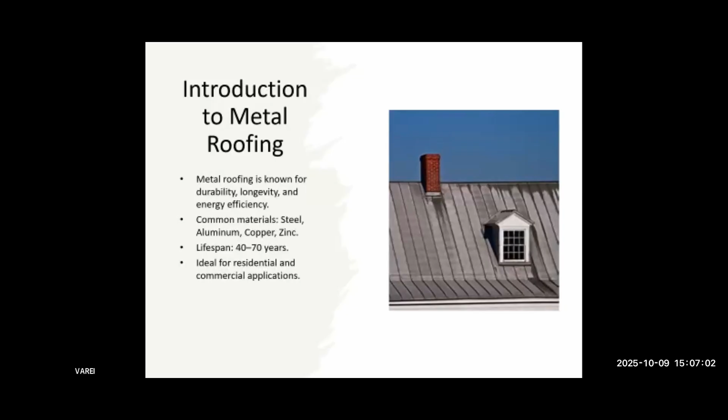Categories of metal roof systems. Exposed fastener metal roof systems. You're going to see this more in rural parts of Virginia. We call it sometimes the ag panel, tough rib, tough lock, true lock. It depends on who you're buying that panel from, what they call that profile. You see it a lot on metal frame, metal buildings, like people putting metal buildings in their backyard. Most of the time, the walls and the roof of that are going to be your exposed fastener metal roof, which essentially you just have a fastener that goes through, and that fastener is waterproofed with a rubber grommet, either neoprene or EPDM.

Stamped metal roofs are becoming increasingly popular. There are several companies that are kind of hanging their shingle around the stamped metal. Stamped metal used to mean stamped pieces of tin that were all put together, very pretty, very hard to find. You don't really see those in newer installations. Now you're seeing stuff in different profiles that look like slate, look like Spanish tile. They even make one that looks like an asphalt shingle, though I don't know why you would spend extra money on that.

But stone coated metal, we've seen a lot of that too, where they're putting a granulation on the outside of that metal to kind of add some rigidity and decrease the amount of metal they're putting in it. I don't really like those. We can talk about that too.

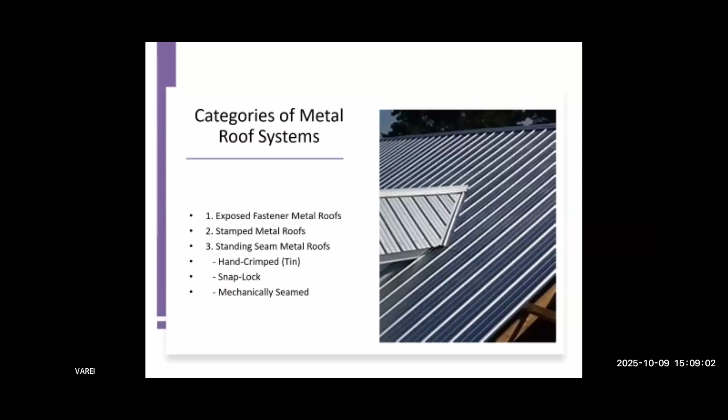And then of course standing seam metal roofs, and that's kind of going to be the high end version of metal. Again, any of your tin roofs, the old tin that you're seeing, is all considered a standing seam. You got the snap lock panel, which we'll discuss, and then mechanically seamed, which is what most of your commercial buildings are going to have on them, and any of your low slope has to be mechanically seamed as well.

So exposed fastener, we just talked about it. Same thing, that's a very popular profile of exposed fastener. The roof typically is going to be a 29 gauge galvalume. Now in steel, the higher the gauge, actually the thinner the metal. Most of your steel panels are going to go from 22 gauge to 29 gauge.

22 gauge being, in almost all cases, an industrial commercial setting where the roof system is also the roof deck. The 22 gauge steel can span structurally over 5 to 6 feet, depending on the profile of the panel, which means you don't have to have a roof deck. That's when you're going to these big warehouses where they have the batt insulation that you see with the white plastic, and above that is the roof. The metal panel is also the roof deck. So what you're stepping on there, below it is just insulation and then the factory floor.

But the exposed fastener roof, like I said, you're going to see that a ton more outside of the city in the rural. Mostly once you start getting closer to Appalachians, you see it everywhere. It is sold as a 40-year roof system, which is why you see it. It is very comparable to an asphalt shingle roof installation. But like I said, that roof is only as good as that rubber grommet on that screw.

So yeah, you're getting a 40-year coating guarantee. Typically, Kynar or Sherwin-Williams, not a knockoff. Kynar, their patent ran out. Sherwin-Williams has moved into that space, making the identical coating, so it's not all Kynar anymore.

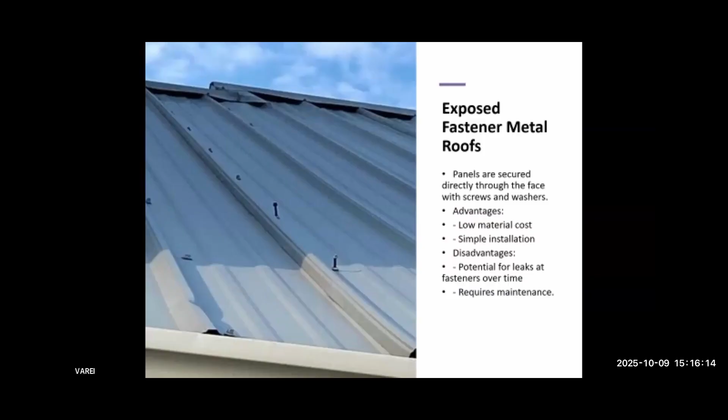You can literally just tuck your fingers under there and feel for it if it's there. You want that to be there because that's how you're keeping wind-driven rain, definitely wind-driven snow, out of those gaps. And if you don't have that, you're gonna have issues with specifically wind-driven snow. You will get leaks there. So that's something that I would definitely flag about the closure. Questions on exposed fasteners? All right.

Stamped metal, we've talked about it. So this is becoming increasingly popular. In fact, the major roofing manufacturers are now starting to move into this space, which tells you the popularity and the money that there is to be made in it. For the last 10 years, this has been kind of popping up, and there's been more independent companies that have been making it. They're just making this stamped metal. Most of it, again, is 29 gauge, very thin. And in fact, there's kind of a rule of thumb: the more bends you see in a piece of metal, the thinner it will be.

So these are, I like the stamped metal. To be honest with you, they do have some heavier duty 26 gauge stamped metal that if we were going to do a stamped metal, that's what I would prefer because you are getting that heavier stuff. The stone coated stuff I do not like.

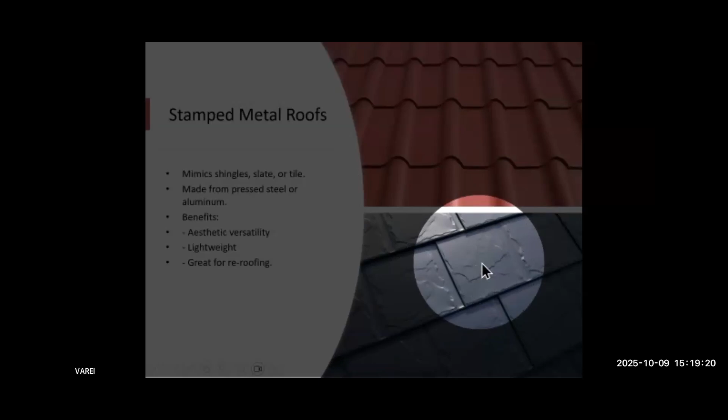So you'll see here, this is an actual seam in this metal, and so is this. And so right here, terrible. This is not that user friendly, I'll be honest with you. Takes practice. Yeah, that's all right. We're gonna abandon it. But they all lock together.

So it's all four sides of that. So on the sides, you got a hem, and then a hem, and then the next piece hems into it. So it hems at the bottom, and it hems to the next piece on all four sides. It's great for wind uplift. But if you get a bullet hole, we repair bullets all the time. If you get a bullet hole, then pulling this piece out, you're gonna pull four hems out.

And I don't know if you've ever taken an aluminum can or something, you bend that thing back and forth, but that metal will break on you if you're trying to hem it and then put it back in. It takes specialty tools to do it, and it takes some time and some cut up fingers, but it can be done by a metal professional.

Again, a lot of the stamped stuff, like the exposed fastener stuff, there are guys that have been historically shingle guys that are now pushing into this because you're still using nail guns, same tools you use to put a shingle roof on. It's the same thing in the field. It's very easy. They're all locked. Once you get your first row going, you're locking them all together, and then you're just nailing them down with roof nails in most cases.

And then the problem becomes, well, what do I do with this valley? Or what do I do with this skylight? What do I do with this pipe, this wall, this dead valley? Super complicated areas like that. So at any given point, if you've got a dead valley or a dead wall, just go ahead and look at that. You'll know if the roof's done right, how that's done. But that's something to definitely look at.

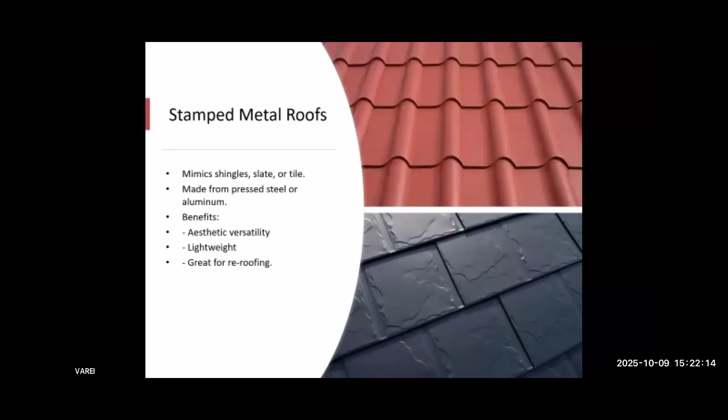Oh, yes, all right. All right, so standing seam metal. There are no exposed fasteners in this, and I will say in the stamped metal, just to clarify, you will have some areas of exposed fasteners. Typically where you have wall hinges and such, anything that overhangs over top of it, they do allow some grommets and screws, so you will see them in some details. So same thing, just pay attention to those grommets.

And on a standing seam metal roof, you should never see any exposed fasteners. It's one of the biggest proponents of that. Most of your standing seams are going to be 26 and 24 gauge. What you're going to see mostly is a snap lock profile, unless you're looking at an old roof, and then that's going to be old school hand crank tin.

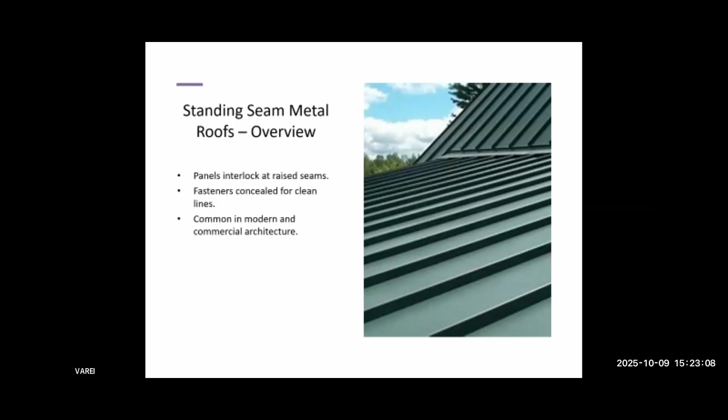So hand crank tin. We've all seen this in Richmond for sure, 100 times. Great roof. The reason we don't do tin anymore is because we don't produce it here in America anymore. Very malleable, very corrosion resistant, even without a coating on it. In fact, if you were to put brand new tin on, you let that weather for a year before you actually paint it or coat it, because if not, it has such a slick surface, you'll never get any paint to stick to it.

I've installed these back in the day with my grandfather. He used to hate them. He cussed the whole time. But you let that weather for a year, and then you go back and paint it and coat it. And this also worked really well back in the day when they let you have lead paint. Lead paint worked really good on these. It still would, you know.

But it's really malleable. You see the hips and the valleys don't have a dedicated cap piece, because you can roll those hips and ridges and valleys the same way you would with copper or zinc, because it's so malleable.

Again, tin used to be the cheap metal roof version until we shipped all of it. Most of the production of tin now is in Indonesia, some in China, obviously. And by the time you ship it across the ocean, you could put copper on it. So that's why tin has really died as a roofing product.

The field of this metal very rarely ever wears out. So you will see roofs that look like this, in this good of condition, with no problems in the metal, because the field is very strong. What you're going to see is problems in the internal gutters. Let's try it again. Thank you. This roof has internal gutters, or Yankee gutters, depending on where you're from.

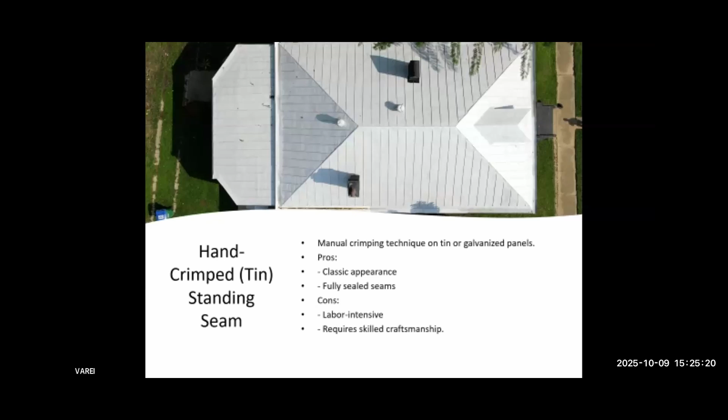We've all seen those in Richmond too, and in Norfolk and Tidewater, if you're out that way. But anywhere that metal is taking a 90-degree bend, that's where the roof is going to fail. Same thing like we talked about: around the chimneys, up walls, anywhere it's taking a 90-degree bend, as that metal over time is expanding and contracting, it is folding that metal. And so you're going to get breaks there.

So you might show up and the roof looks phenomenal, but the internal gutters are leaking, or around the chimney is leaking, or up a wall is leaking. And there's no way to properly repair that. You can coat it, you can put a bunch of tar on it, we see that all the time.

That's the only thing you can do, because the one downside of tin is, yes, it is malleable the first time. If you were to try to take out one of these panels and unfold the hem, you've got the male piece and the female piece that comes over, and then all of it rolls over together.

The clip that holds that down is in that fold. So if you try to unfold that and then put a new piece of metal in and fold it back down again, 9 times out of 10 on a 50-year-old metal roof, the hem is going to break. And now you're in a can of worms scenario. So there is no pulling a panel out of this.

There's no doing one part of the internal gutter. So what to look for there is parts of the roof that have been heavily coated and caulked and tarred, because they're trying to repair this one little spot without re-roofing the entire thing. So if you're seeing that, flag it, because at any given time, if there's already a coating on it, any coating you do past that point is only going to stick to what it's sticking to.

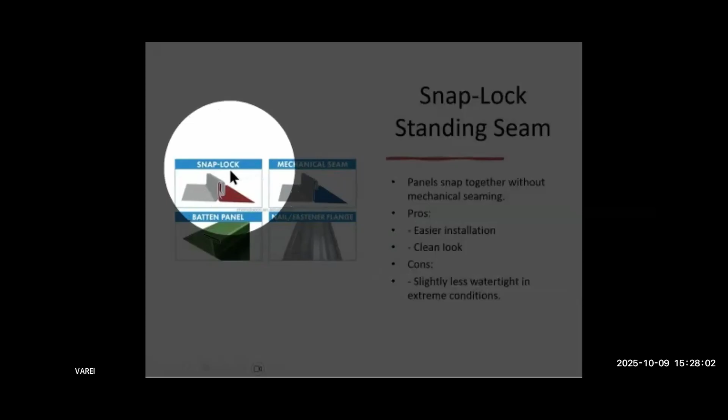So you've got 2 snap lock systems here. This is a clipped snap lock, and so you can see essentially your male piece has a clip that sits over. You screw that clip in, and then the female piece comes over. You're taking a rubber mallet, and it snaps down over top of that lock. That's why they call it snap lock.

And so that's the clip version, the better version of snap lock, because it allows the panel to freely expand and contract. Now, how are you going to know if it's a clipped or non-clipped system? It doesn't really matter, because at the end of the day, if the roof's not leaking, if it's not failing, it doesn't matter for y'all's purposes.

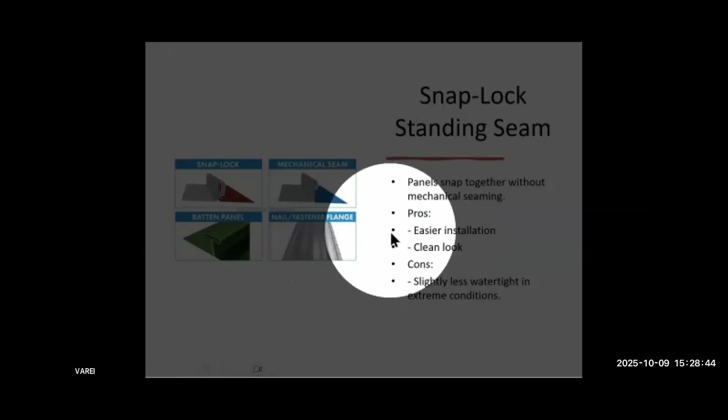So what you're going to see most of those is the nail fastener flange. Same thing, it's easy to buy in a kit. You don't have to really have specialty tools other than some snips you can get at Home Depot, and some hand benders if you want to get fancy.

But you have essentially a nail strip on one side, the same way vinyl siding would have, if you're familiar with that. And so the downside with the nail fastener flange, yes, it is easy to install, again, until you get to the walls and all of the complicated stuff, where it really separates the pros from the don't-know-what-they're-doing guys.

The idea is there's a slit there, and so you're putting a screw in it. You don't have to worry about the clips. And the idea is you don't put that screw tight enough to where you are pinching the metal, to minimize that expansion and contraction. Because anytime you're putting something in that metal that is stopping it from freely expanding and contracting, which metal is going to do more than any other roofing material, you're creating a pinch point.

And same thing, that can create some bind and some twist, and same thing, you're bending that metal now with expansion and contraction, causing breaking in the field of the metal. And that works great in theory. The problem is if you leave that screw up on that nail flange at all, it will transpose to the next panel when you put it up.

And so what that means is, you leave it loose, so yeah, it can expand and contract. When you snap down the next piece, a lot of times, especially walking on it, you'll actually step on a screw, and that screw will put a dent in the metal right up against the seam. Does not look good. Customer does not like that.

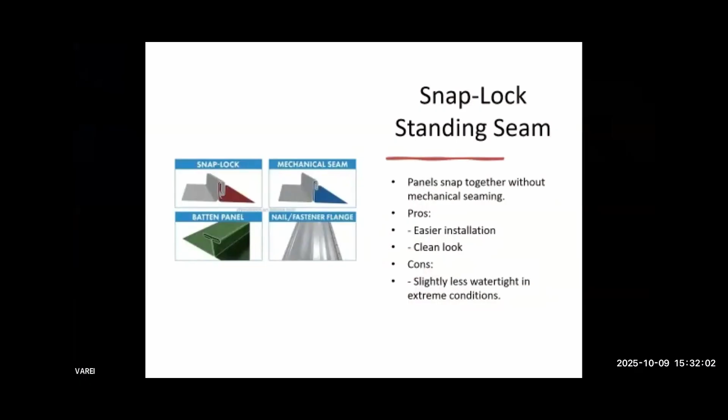But that's the downside of most of your snap lock. It does not freely expand and contract. Also, the seam of it alone is held just by tension. And so through that expansion and contraction, you are losing some of that tension that's holding that seam together. So while it comes with a 35 or 40 year guarantee on the coating, a lot of times you'll start to see the roof system fail because the tension in that snap over time has kind of given up. Panels will start to slide, they'll start to blow and pop up, and then guys go out there and put rivets in and all kinds of crazy stuff. But that's what it is. But it looks like the real thing, and it's quite a bit cheaper because it's not nearly as labor intensive.

So the mechanical standing seam. Again, this is the only low slope installation that you can do. It is the same exact concept as the old tin. So you can see on the mechanical seam there, where you at? Right down there. All right. So you see that metal's all rolled over on itself. Now, this is going to be typically 24 or 26 gauge. 24 gauge works better because it does reduce a ton of your oil canning and gives you a much better product at the end. The clip goes in over the male piece, and then you've got your screws in it. The female piece comes over, rolls over with the clip included in it.

It allows the entire thing to expand and contract, and then you're using either hand crimpers, and do not fist fight a guy that's hand crimping metal all the time, I'll tell you that right now, he's a beast, or using machines that seam it. And the machines are what really turn those guys off to it. A good seaming machine starts around $6,000. Those guys are not willing to make the investment. And it's still hard to do. Even with a $6,000 seam machine, you can mess a seam up, and then you're taking that seam up with needle nose pliers. It's the worst. Guys are super upset when you're like, hey man, we got to take this seam back up.

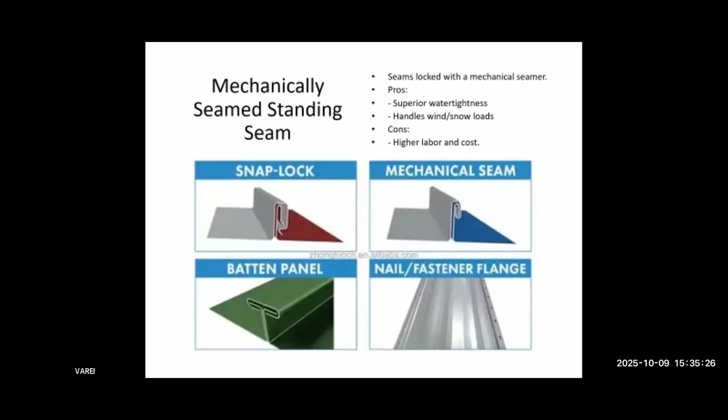Maintenance and performance - I will say this, the coatings game is like cell phones. It has completely changed in the last 15 years. Coatings used to be snake oil. Guys like, oh, you get 20 years out of this, you get 25 years out of this. And they never lasted more than 2 years, and then they changed the LLC and bankrupted that company, and they did that for a while.

But there have been some very successful coatings, specifically for metal, as long as it has not already been coated. So what you'll see, specifically on tin, a lot of times, and you got to see it on all kinds of roofs, is that aluminized coating. I don't know who came up with that, but they made a billion dollars, and it's the worst thing you could ever put on a roof. It's good for UV protection, so if you're trying to protect like a modified bitumen membrane from UV breakdown, it works good for that. It is not a waterproofing material. It does not stick well at all to metal, so it starts to chip and flake and crack off of it. And at that point now you're stuck.

You can't, just like with any coating, same thing - it only sticks as good as what it's sticking to. And so we go out to these tin roofs, like, oh, I just had this aluminized coating put on 5 years ago, and they want to coat it again. And I'm like, well, yeah, the next one's gonna last 2 months because it's gonna just chip off the stuff underneath of it.

If you go out to bare metal, or even metal that's been painted with like an actual paint, especially the lead stuff, that can be cleaned and coated with a coating that really truly will last 25 years. Even the newer metal that has a Kynar coating or PVDF coating on it, there are 2-part coatings for that, where you're using a Kynar primer that essentially roughs up that Kynar so you can get good adhesion on the actual coat. The top coat is actually an acrylic, and it will stick to that roof and coat that roof for 25 years.

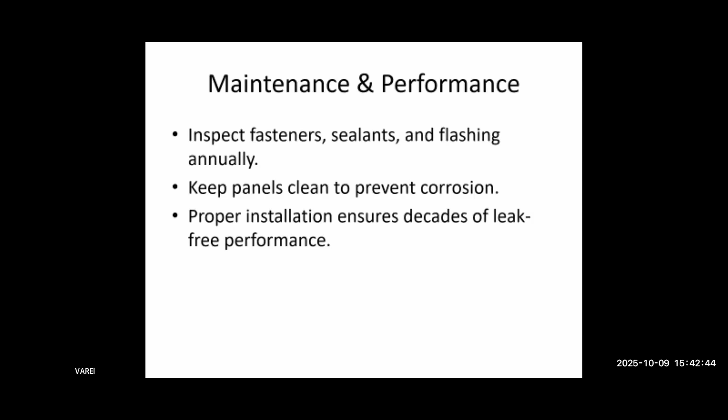Have you seen solar panel installations damage metal roofs? Do you have special hardware for solar panels? Yes, absolutely. So, if done right, a metal roof is one of the best substrates for solar. Because there are clipped versions of the racking, where it's essentially just a tension clip that goes on that seam, and then you're not actually puncturing the roof.

Now with the exposed fastener roofs, for different profiles, they don't have that. And so all they're doing is taking what they call the L foot, which is the part of the bracket that actually attaches to the roof, and then they just screw it through with silicone again. In that case, I would be very wary of that. Again, it's considered acceptable from the solar company side, but with any solar, all of you run into this now with the prevalence of solar.

The roof is installed, solar's installed, they get a leak, the solar company's like, that's the roof, the roofer's like, no, that's the solar. You're gonna run into that. But the problem is if you damage that metal roof, that's a much larger problem than if you damage the shingle roof.

I know we're talking about metal roofs, but I've had clients ask me about that Roof Maxx product that's pushed on. Yeah, soybeans. Yeah, and I'm skeptical of it, but I wonder what your take is on it.

Yeah, so okay, so their science, they've got their third party people that have claimed, making grand claims. But like with anything new, I mean, of course, we like to be on the cutting edge. But with anything new, I always tell customers, let's just wait and see what's happening in 10 years, right? If it's holding up to 10, because they're putting a 25-year warranty on it. And it does show there is some promise there.

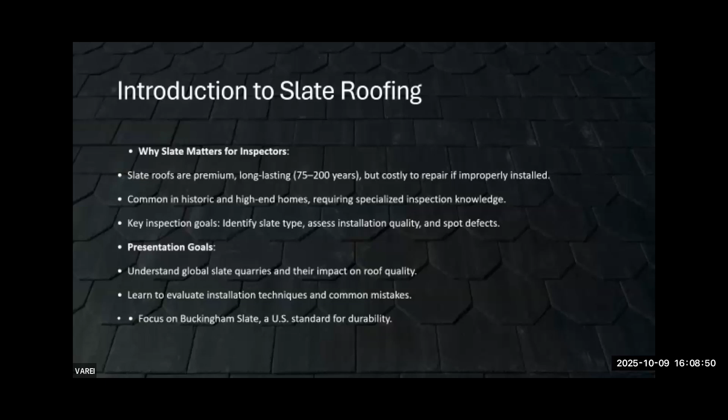Types of roof slate, so obviously natural slate, it's quarried all over the world. RIP Buckingham slate, it's one of the best slates right here in Buckingham, Virginia. They are no longer quarrying roofing slate, which is tragic. So, in fact, Buckingham is going to be what you're going to see most of here in central and coastal Virginia, and you're not going to be able to get it.

So Buckingham's actually a phyllite. So slate is shale under heat, pressure, and time. And phyllite is slate under more heat, pressure, and time. It's actually a denser stone than slate. There were only 4 phyllite quarries in the world, only 3 now. You still get some like pavers and stuff in Buckingham. They're not going to really do slate anymore.

But you're going to see that, and then you're going to see a ton of Vermont slate as well. So Vermont is going to be when you see the color variance. You're getting like lighter grays, buff tones, some of the purples, some of the greens. Those are all Vermonts. They're quarried pretty close to each other up there in Vermont, so you get all that stuff. Of course, synthetic slates are becoming increasingly popular. The stamped metal, like we talked about.

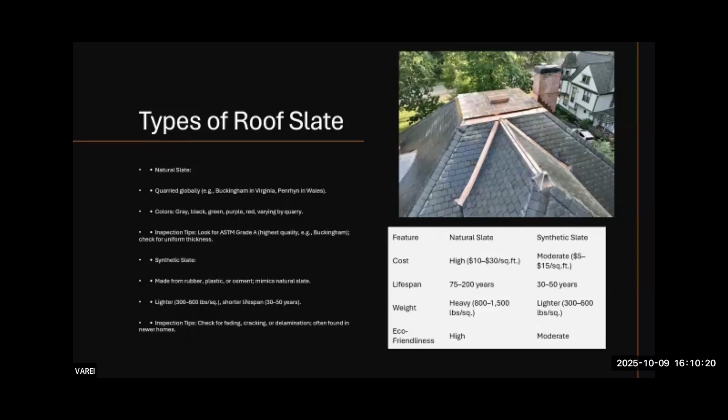And then, let's see what else I got there. Yeah, that's pretty much it. Just some cost breakdown there. Yes, I'll get Hollis to email this to you if you need it.

Local slate quarries. The quarry really matters. So depending on where the slate is quarried will depend on the color of the slate and the quality of the slate. When we talk about quality of the slate, what we're really talking about is absorption rate. Okay, so slate and tile and metal are the 3 where the sun is not the enemy, right? With metal, oxidation is the enemy. So anytime you're getting bare metal up there, the oxidation will burn it away. With slate and tile, it's absorption rate that is the enemy. So the more water absorbs into that stone and freezes and thaws is what's going to break that up over time. That's the weathering process for slate.

So the denser that slate is, so phyllite, for example, has like a 0.000091% absorption, so no absorption. And they'll last the life of the structure. So we've made repairs on Buckingham roofs. The slate's over 160 years old. Slate's in the same condition it was when it was installed.

Just a phenomenal material. Brazil has, Argentina has a couple of phyllite mines. Spain does. There are some Welsh mines that have phyllite as well. In fact, a phyllite in Wales is almost identical to the makeup of Buckingham slate. But good luck getting that.

So most of what you're going to see here is, like I said, Buckingham. If it needs to be repaired, it can be repaired with a Spanish black. Not as good of a quality of slate, still lasts 100 years, and to the untrained eye, you won't be able to tell the difference. So just because you see a Buckingham slate roof doesn't mean it can't be repaired.

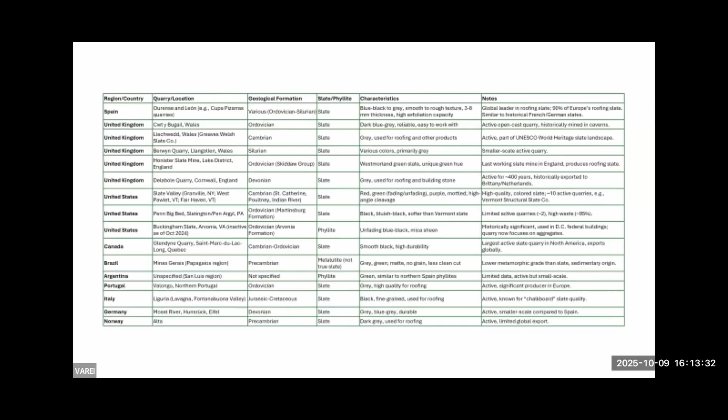So again, this is just the regions, the different things. Happy to email this to you. I don't really want to go through it unless y'all want to go through it. But you study this, then you can start to look at some of the different slates and what they look like, and you can identify those.

Buckingham slate quarry history. We just talked about it, right here in Buckingham, Virginia. Most of the slate on the East Coast, especially colonial period slate, it's all Buckingham. You're just not gonna find it anymore. That's the problem. There are a couple of companies, my competitors, I won't tell you who, but they got a couple of pallets of stuff they can still do it with. You can still find reclaim. I do have some reclaim avenues where roofs have been torn off and they've kept that slate. But you're not buying new Buckingham anymore.

So what you're really looking for during the inspection, obviously, is broken pieces of slate, but also the installation techniques they're using, specifically the metal they're going to use. Now, if you're going to go up on a slate roof, before you walk on it, one of the quick things you can test for installation is, is that slate going to move at all? If you go up and start trying to move slate and none of it moves, do not climb on that slate. It's going to break all underneath your feet. Every piece of slate should have some movement to it.

The reason slate breaks over time is either it's a defective slate, has iron ore in it or something like that, or it's typically settling in the house. You put a slate roof up there, and in the areas where it settles, it puts that slate under pressure, and that will eventually break it. If the slate is allowed to move, you can walk all over it and it won't break. Obviously, if you're starting to see a lot of slate sliding out, where it's not just one or two pieces and looks more systematic, that's indicative of the nails actually starting to fail.

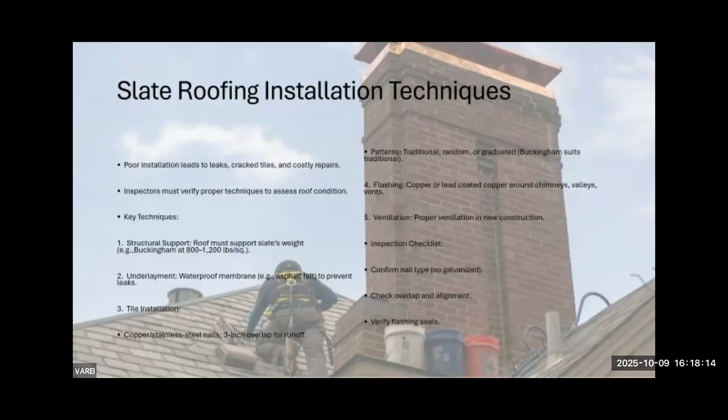I've literally seen areas where slate is missing, where the underlayment and everything is gone. The roof deck is grayed for how long it's been exposed. They're like, oh, my roof's not leaking at all. I'm like, oh yeah, it's 100% leaking. You just don't see it inside. But then you have a roof where you can't see anything, and you've got this mystery. So there's a lot of gray area in both directions for this.

So inspection: essentially a sagging roof deck under the slate, where you're starting to see a lot of that settling. Any of that settling puts that slate under a tremendous amount of pressure. Anytime we see tight slate or a sagging roof, we know that the maintenance cost of that roof would be a lot higher than a roof that doesn't have it, just because it is putting that under the strain of the weight of the slate.

Again, steel nails. Like you're seeing steel flashings that are rusting, those nails are also beginning to rust. Steel nails on a 100-year-old house means higher maintenance costs than slate that doesn't have it.

And then more overlap. It's gonna be hard for you guys to see what the overlap is unless there are some missing slate. But essentially what the headlap means is, you have a piece of slate that goes in, they stack right beside each other. The next course comes in over top, and that slate is staggering over those bottom lines from the one before it, and on and on. The top of the slate down here has to go under the bottom piece of slate 2 courses above it, so the water is not running in behind the slate in those bottom lines.

And so the headlap refers to this slate down here. How far does this slate down here go under the bottom piece of slate 2 courses above? On new installation, you want 3 inches. That's what the Slaters Association has agreed on. A lot of stuff you'll see on super steep slopes is going to be 2 inches.

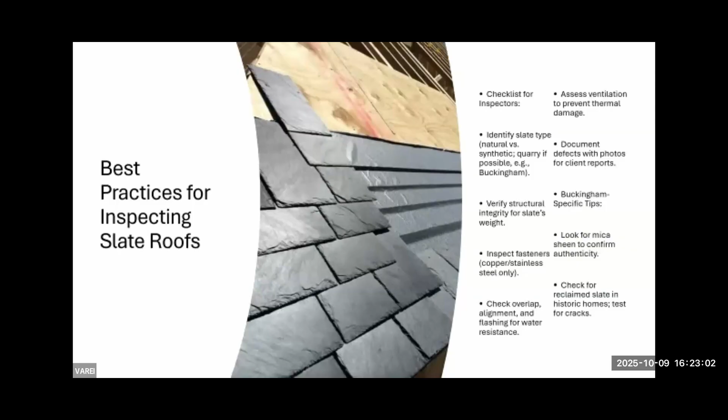But always look to see if there's a stack of slate laying around, because a lot of times they would keep the slate and stack it on end. If you see it laid flat, a lot of times the slate would be bad, because of freeze-thaw on the layers, but stacked like a book on the end, those slate will last forever sitting on the ground. So if you see those, you can say, well, there's some slate missing, but it'll be cheaper because you already have slate. What's it going to cost? We'll call it.

So that's slate. Any specific questions on slate?

Is slate installation and cedar shake installation similar? Similar, yeah, all slate roofing is similar to a degree. With shake, you're getting more layers of that, you're stacking them in tighter. The top of that shake is actually going 4 courses up instead of 3 courses up.

With new shake installation, and even old shake installation, you're taking your tar paper underlayment, running a row of shake, and then the headlap of that's actually getting covered with tar paper. Then you're running a layer, so you're interweaving that underlayment into the system. You don't have to do that in slate.

You do that in shake because specifically now, with new red cedar, you're not getting any of the old growth cedar. The difference between new growth cedar and old growth cedar -- getting off on a tangent here, but I am a building material nerd -- is the taproot of that tree. Any evergreen has a taproot that goes into the ground as far as the tree is out of the ground, so a 100-foot tree has a 100-foot taproot. In a GMO tree, they engineered out that taproot so they can go from sapling to harvestable tree in 25 years instead of 200 years.